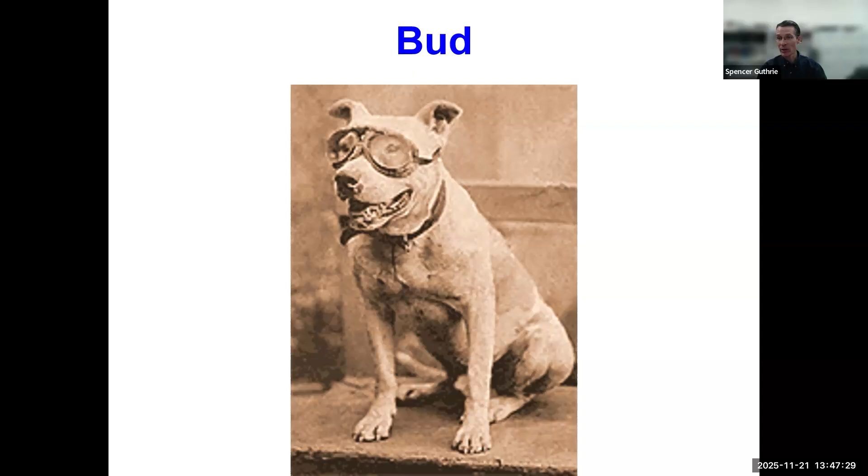After they left, two other groups, hearing of their departure, attempted to beat them across the United States in this historic journey. But they were the first ones, and the car, as well as the goggles, are now on display in the Smithsonian Institute in the transportation exhibit for us to admire.

Since that time, as cars have become more prevalent and the desire for travel became more prevalent, the field of pavement engineering developed in the United States. Of course, our goals are to provide a safe, smooth surface for the traveling public. It's also to provide adequate structural capacity using available materials and to resist deterioration due to traffic and environmental variables. Let's look at each of these for just a minute.

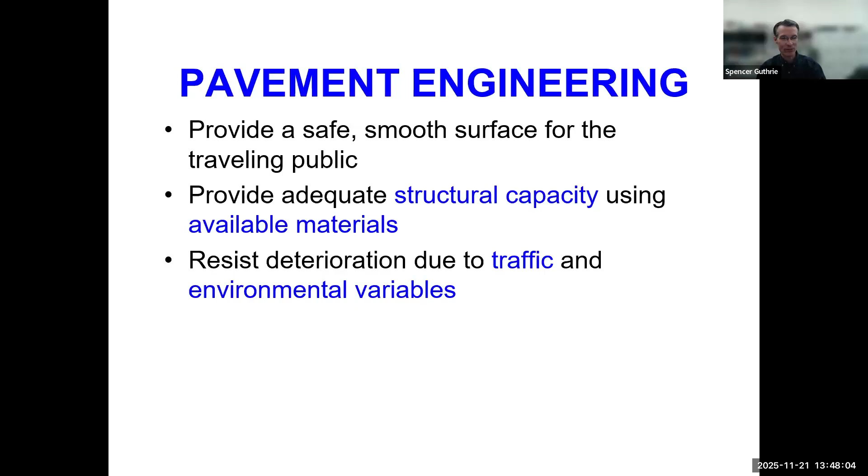Regarding structural capacity, we typically specify various layer types of specified, even calculated thicknesses to ensure that each layer serves its intended function. Of course, we give a lot of attention to the asphalt or concrete at the top, don't we? We hear a lot about it, we see it as we drive. The underlying natural subgrade is what Mother Nature provided us to build the road on. We have little control there.

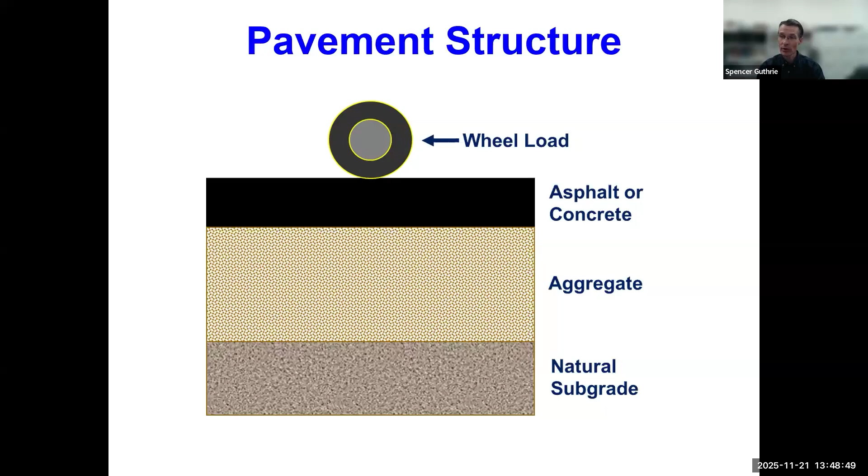I'd like to point out today and emphasize the intermediate layer labeled as aggregate, the base material, often unseen and underappreciated. The base material not only protects the underlying subgrade, but also supports the overlying asphalt or concrete.

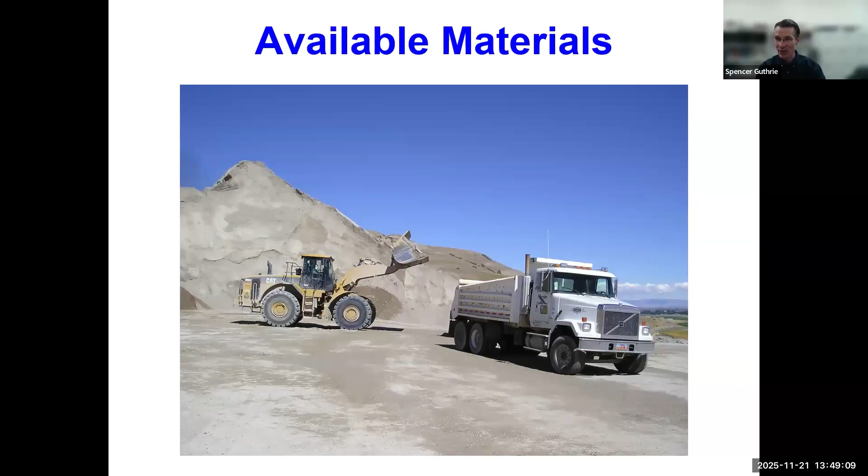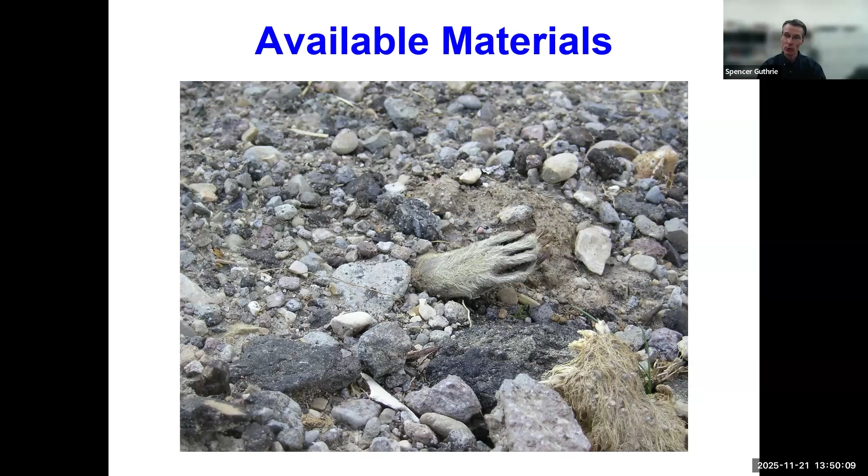Sometimes we need to use that local material. Where my grandparents lived in Louisiana, I believe they had more alligators than they did aggregates. In those places, sometimes it was more cost effective to barge aggregate in from South America than to truck it in overland from West Texas, for example. So thinking about available materials is very important in the design process. That means if we're using inferior materials, such as pictured, we need some way to stabilize it and improve its engineering properties.

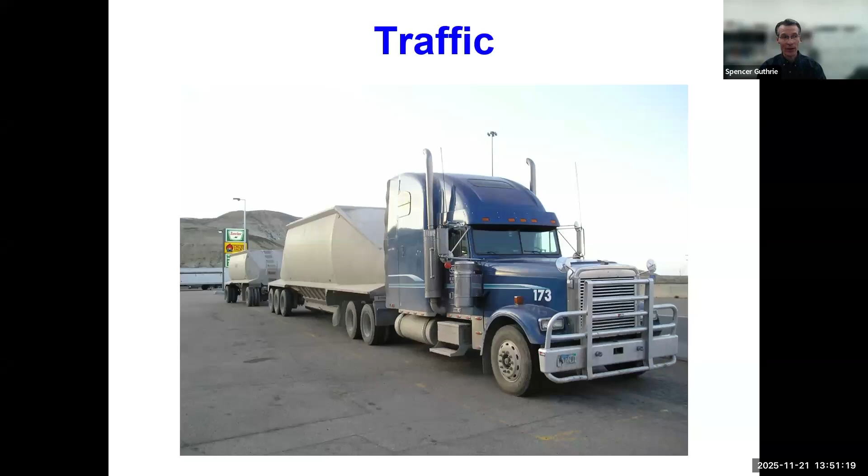We like to keep water out. We want roadways to be well drained with an appropriate cross slope and longitudinal slope, and we need adequate drainage structures. In some ways, pavement engineering becomes a very multidisciplinary field that is quite exciting.

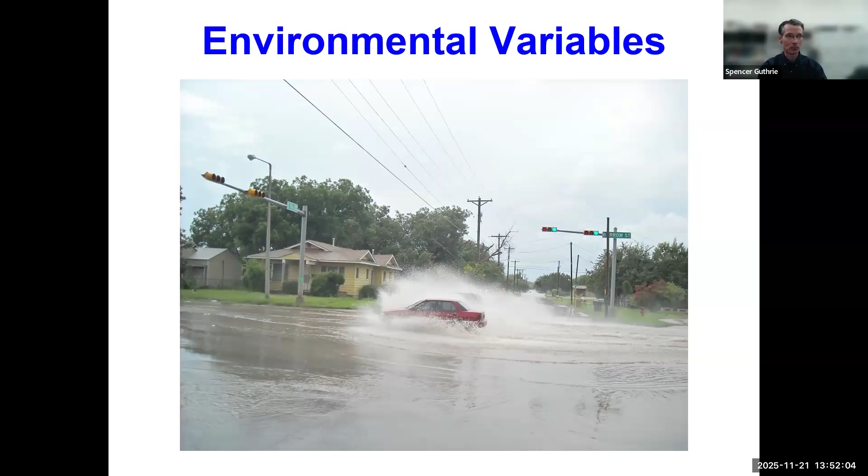Because of the snow and ice and Utah's very clear bare pavement policy, we spend a lot of money clearing roads. In fact, in Utah we have about 22 to 25 major storms per year, and we spend about $1 million per storm just clearing the roads. We'll apply about 200 to 300 pounds of salt per lane mile per storm. This is a very significant part of what we do.

Freezing weather also freezes the underlying materials, and sometimes that causes frost heave, a lifting of the pavement surface that causes roughness and sometimes requires a reduction in speeds.

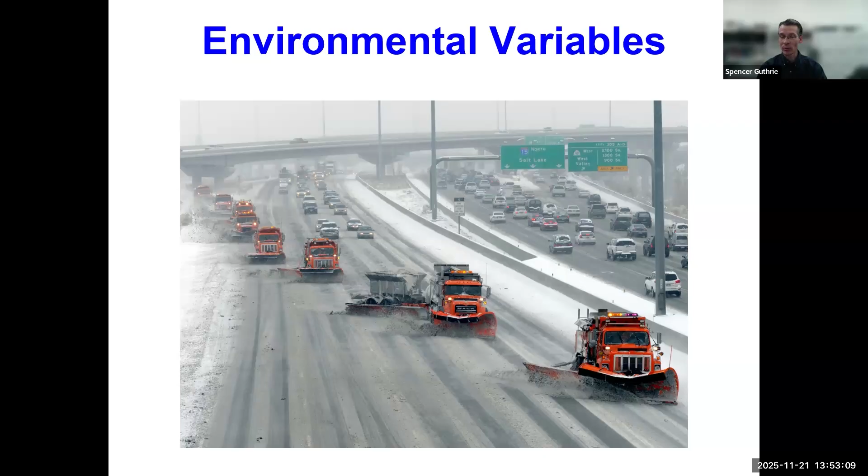So regarding pavement condition as a result of these variables - trafficking, water, and freezing - we have some deterioration that might occur. Nationally, roads received a grade of D+ in the 2025 ASCE Infrastructure Report Card, and some challenges come along with this.

Funding for road reconstruction remains limited while costs are escalating. Traffic is increasing, and drivers have high expectations for serviceability. We want to go where we want to go, when we want to go there, and we expect a smooth road.

Pavement engineers and managers are therefore focusing increasingly on preservation of existing roadways under the mantra that good roads cost less. In other words, spending $1 on maintenance now can save us $10 on reconstruction later. Maintaining roads in good condition also positively affects the economy.

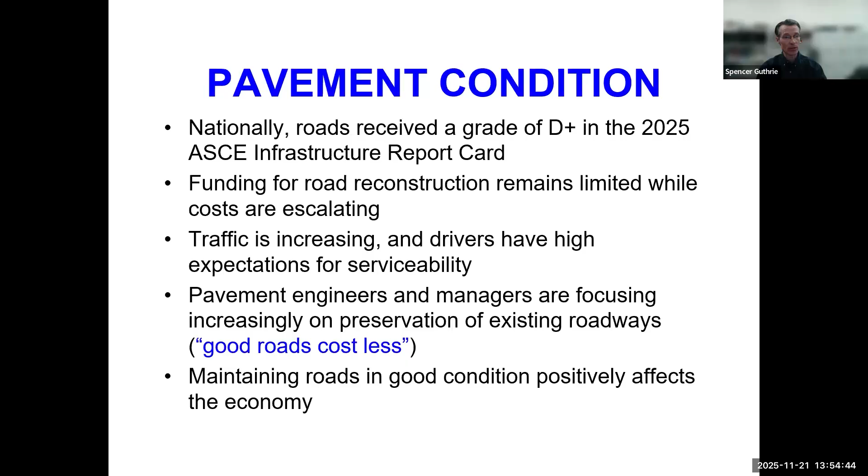In some of our local cities, very strategic policies are made to maintain the most important roads - the commercial roads, the collectors, the arterials - in good condition, even at the expense of the residential roads, because we need to retain and attract businesses so we can derive income from property tax and sales tax to continue to fund the roads. This leads to the important topic of pavement preservation.

In other words, applying the right treatment to the right road at the right time. Earlier in my pavement design class this afternoon, I showed some pictures of an alligator cracked asphalt roadway. Can y'all envision that? Fatigue cracking, structural cracking all across an asphalt roadway.

The city, under a very limited budget, could only apply crack seal one time after another to hold that road together. Ideally, we have crack seal applied early in the life of a pavement, and then as it progresses, we begin to use more invasive or more comprehensive repair services.

The process of pavement preservation is really a strategic process intended to maximize the pavement service life with a minimum overall cost to the owner, and hopefully to the traveling public as well. Eventually, however, despite our efforts to prolong that inevitable deterioration, all roads will need to be reconstructed.

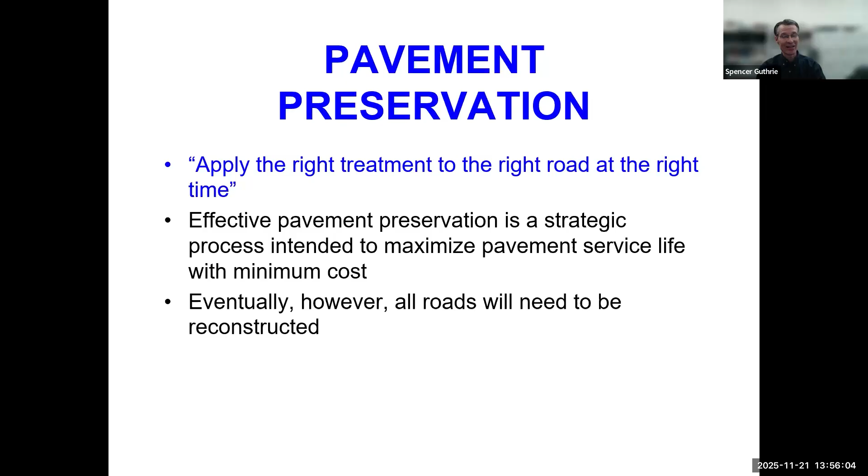A traditional reconstruction might look something like this - the asphalt has reached a terminal condition. I'll pause to note that in the future, as y'all are interacting with members of the media, and referring to a roadway or bridge or other infrastructure, I recommend using the term 'terminal condition,' not 'failed.' The word failed sometimes incites emotion, worry, and panic, so you can just say the road has reached a terminal condition instead.

So here we have such a road, in a neighborhood. The excavation has occurred - we can now see the asphalt, the underlying base material, and in this case the native subgrade, which was clay, very soft clay. The objective was to deepen the pavement structure by removing the upper courses, the asphalt and base, over-excavating the subgrade, then putting back in all of that pulverized material removed earlier, and creating a new base material.

So this is very interruptive. Individuals coming home each night cannot park in their driveways or easily reach their own home. In some cases, public services cannot reach the neighborhood - ambulances and garbage trucks cannot get in. In fact, contractors are often required to carry all of the garbage cans out to the end of the project. These are policies we have to be concerned about - this is a difficult task.

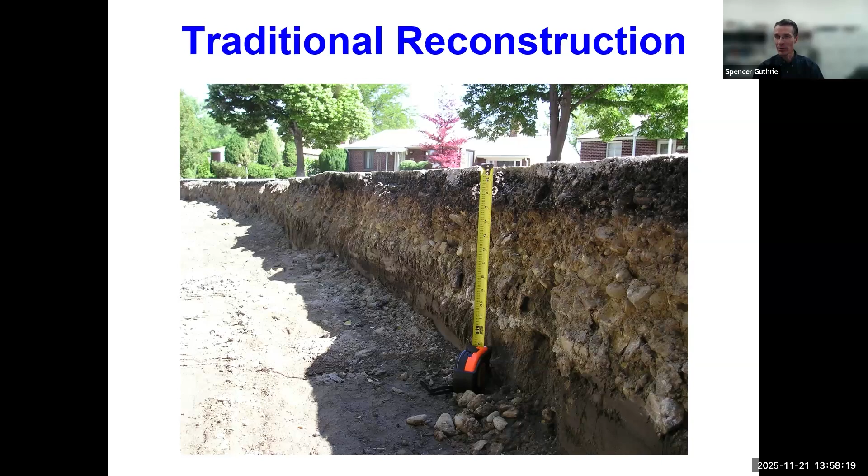So this is difficult, right? There are real costs for our traveling public. And so with that motivation, I introduce a full depth reclamation process that can be very advantageous for many pavement projects. In fact, the process of FDR, full depth reclamation, with cement stabilization is becoming more appealing than a traditional reconstruction approach.

FDR consists of the in situ pulverization of a typically failed asphalt layer with a portion, might be all, might just be a part of the underlying base, to create a new base layer. FDR is most commonly used to rebuild structurally failed asphalt pavements, generally exhibiting at least 20% fatigue cracking or more than half an inch of rutting. Under those criteria, a roadway might warrant some full depth reclamation consideration.

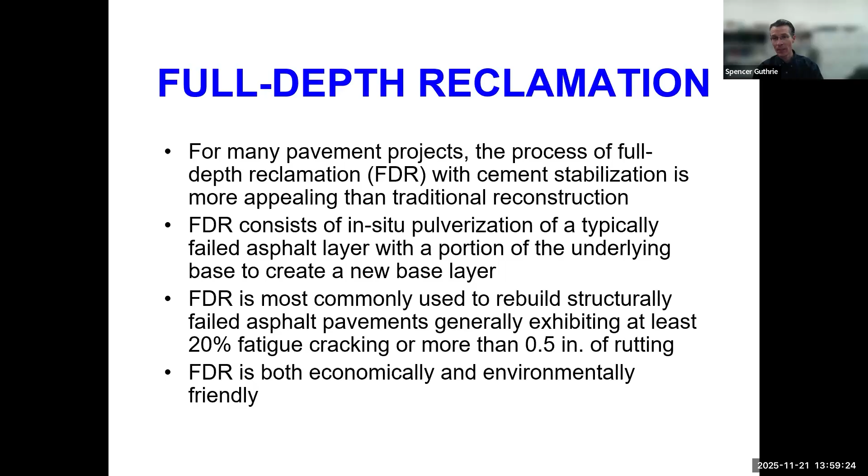It's both economically and environmentally friendly. Let's look at some of the benefits of full depth reclamation. First, it conserves in-place materials. We reuse the materials on site. Mom and dad, or grandpa and grandma, paid for those materials, their taxpayer dollars perhaps provided for the original construction of the road. And now we can reuse, repurpose, and improve those materials by leaving them right there on the same job site. Therefore, it requires little or no material hauling.

And because we're not removing and bringing in new material, we reduce the loads on the adjacent streets. In so many instances, we provide a full depth traditional reconstruction at the expense of the surrounding streets, putting many heavier traffic loads than would have been needed if we had simply used FDR. It reduces construction traffic in neighborhoods, which is improving safety, especially for pedestrians in school zones where children might be crossing frequently. It can also be used to maintain or improve the existing grade to address drainage problems that might exist.

It saves cost by using that in-place investment. We already paid for it. We own it. Why not reuse it? We also save energy by reducing mining and hauls, reducing the use of the original material. And therefore, we say often that it's a very sustainable process.

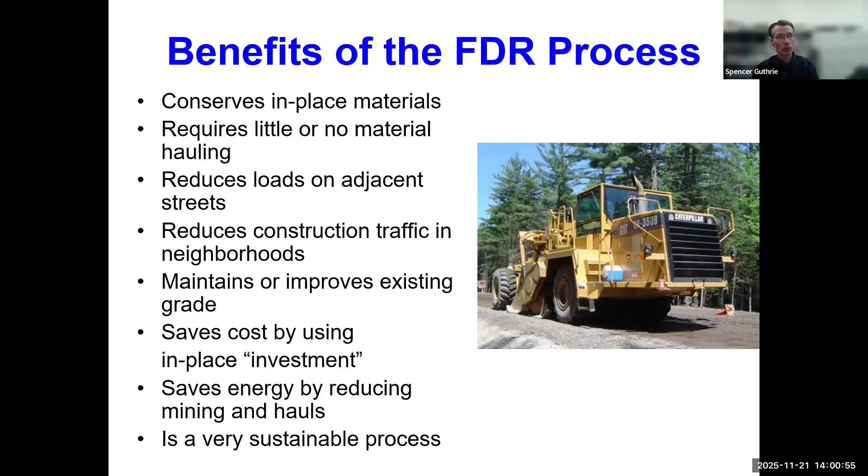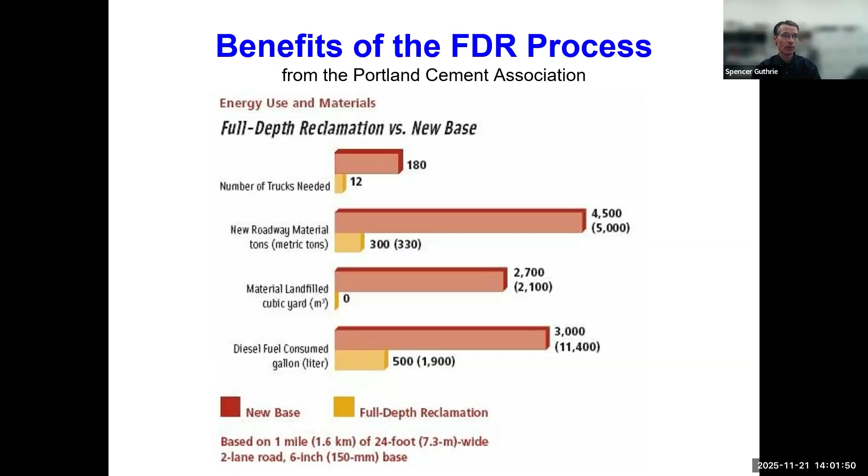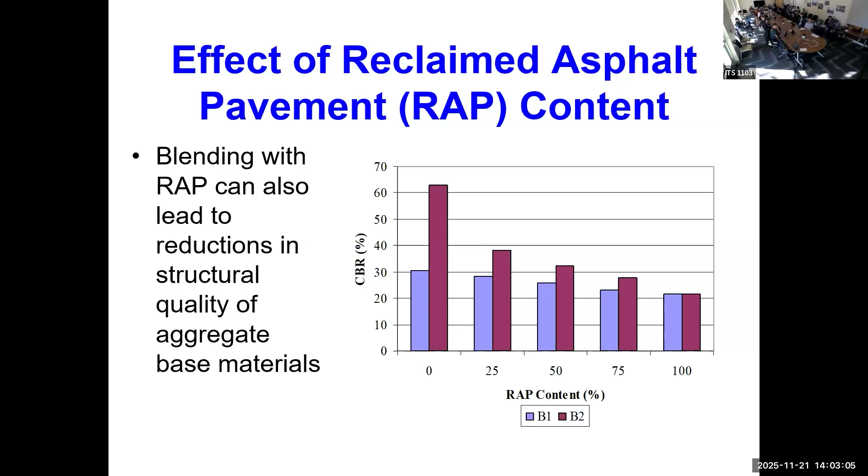Therefore, when we blend RAP with any base material having a higher CBR, such as 30 or 64 in this picture, we inevitably reduce the CBR of the combined blend. And after blending with RAP, we may decide that this blend is no longer suitable from a structural perspective, and it needs some improvement in its structural capacity. And so at that point, we like to introduce the use of some stabilization. In this case, I'm going to talk about Portland cement, perhaps the most versatile, most common kind of cement, the same cement that would be used to make concrete.

When we use cement, even in small concentrations—for example, 2% to 6% by weight of dry aggregate is really common—we get all of these benefits: increased rigidity for distributing loads, an almost entire elimination of rutting below the surface, reduced moisture and frost susceptibility, reduced fatigue cracking of the asphalt layer, and we can use a thinner pavement section, which is frequently a solution when we have existing utilities that were constructed in a shallow manner.

Perhaps many of you have been on jobs where especially a natural gas line was found by an excavator or a reclaimer machine, and now we have to stop all of our work, evacuate the neighborhood, call 911. That's not a happy day for the contractor. So there are a lot of benefits of using cement.

Here's a schematic that shows the...

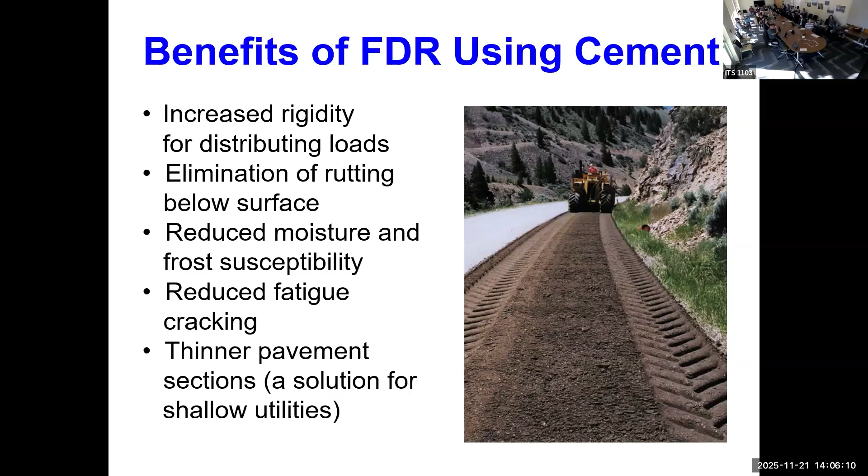May I interrupt for a second? Please, I apologize, we forgot to establish our ground rules for asking questions. Is it okay if we make stop points and see if there are any questions? Sure, is this a good time? Absolutely, anytime anybody has a question, just interrupt. All right, are there any questions on the background, on the method? What are you guys thinking? Here's a question: I've done some cement stabilization before, but I've only heard of up to 4% addition of cement by weight of the aggregate, and I had you mention up to 6%. Could you tell us to what extent you can add what percentage of cement and avoid making the base of the road too rigid for the asphalt layer that's coming above it? Looks like we got a super technical question, Spence. If you don't mind holding on to that one, are there any more general questions about the method and all the background that Professor Guthrie really nicely laid out for us? We will also have time at the end for some more questions and discussion, should y'all be interested. Sounds good, I just sometimes a question gets in my head and then I can't let go and listen to the rest of it. I just want to make sure I don't have anyone like that right now. Got it, dope. Do you want to answer that technical question now or later? I will answer it along the way, it's an important question, and I think we can address it with some additional slides. Perfect, is that okay? Yeah. Okay, fantastic, thank you. You bet.

Here is a schematic showing this full depth reclamation construction process. We start on the left-hand side with the original pavement. As I said, it might be considered failed under rutting or fatigue cracking, the common mechanisms that we see. We bring in a reclaimer, I'll show pictures in a moment, to pulverize the asphalt with all or a part of that underlying granular base material.

And then if we're in a city, which is the focus of my presentation, and we have elevation constraints—for example, existing curb and gutter, existing driveways—then we may need to remove, as shown in step 3, a portion of that pulverized material. Alternatively, we could also just remove the asphalt layer and then cement treat the underlying base without adding any of the RAP.

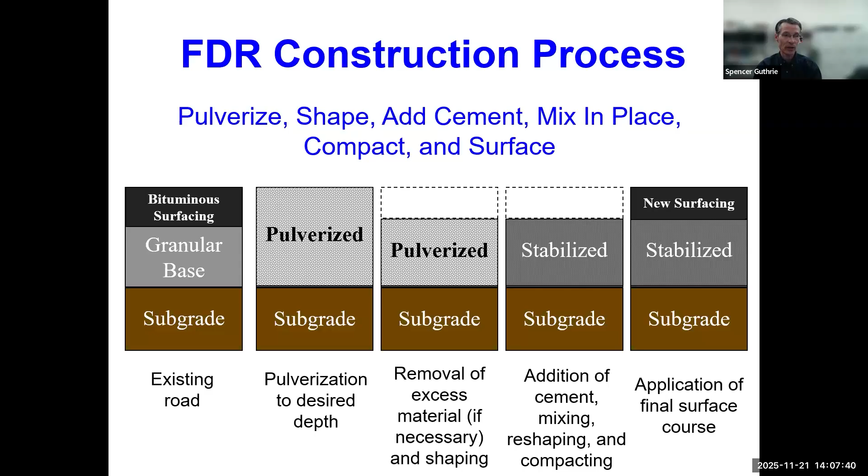The fourth step shows stabilized base material now, perhaps with cement or another appropriate stabilization agent. And once that's been appropriately cured, then we can put a new surfacing, which might be either asphalt or concrete, or in some places in the world, we might just put a double chip seal on top of the stabilized base material. And that's a far lower expense than placing a new HMA or Portland cement concrete.

Up to this point, I've primarily shown you pictures of FDR in conjunction with cement stabilization in very rural locations. Historically, that's where we have been able to use this technology. Today, I'm going to show you an approach that allows the use of FDR with cement stabilization in urban environments, where we often have higher ADTs, higher ESALs, the equivalent single axle loads, where we would benefit even more.

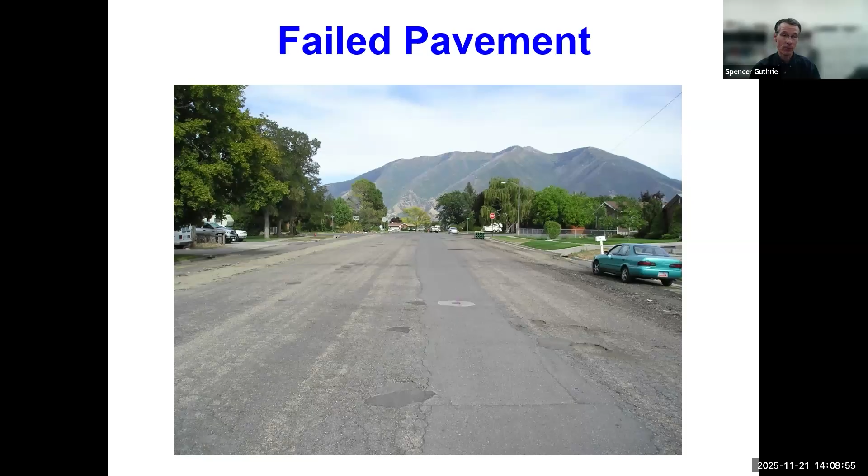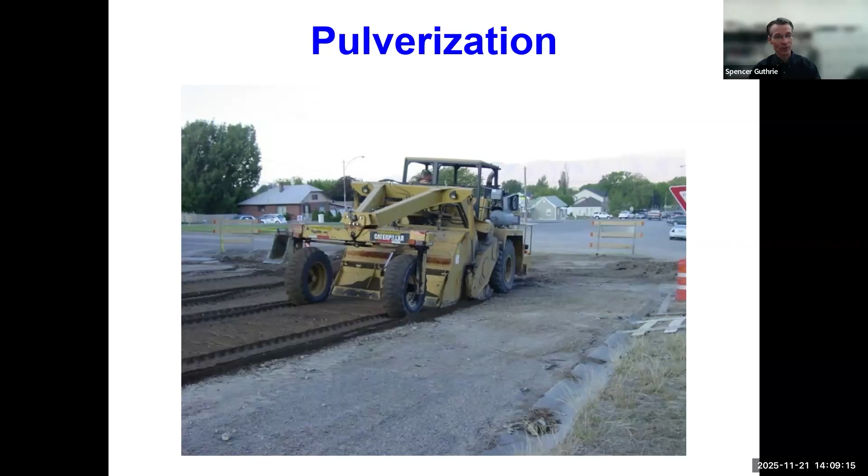So here's the failed pavement, and this is called a reclaimer, a large machine with a rotating drum between the front and rear axles that with a lot of horsepower can pulverize the asphalt and mix it with a portion of the underlying base material. After the material has been pulverized, we can reshape it. If we don't have access to a large machine, we can also use a smaller asphalt zipper. Perhaps some of you have seen these on job sites.

It attaches to the front bucket of a loader and is owned by a lot of cities. They can use this for not only utility trenching, but for full depth reclamation as well.

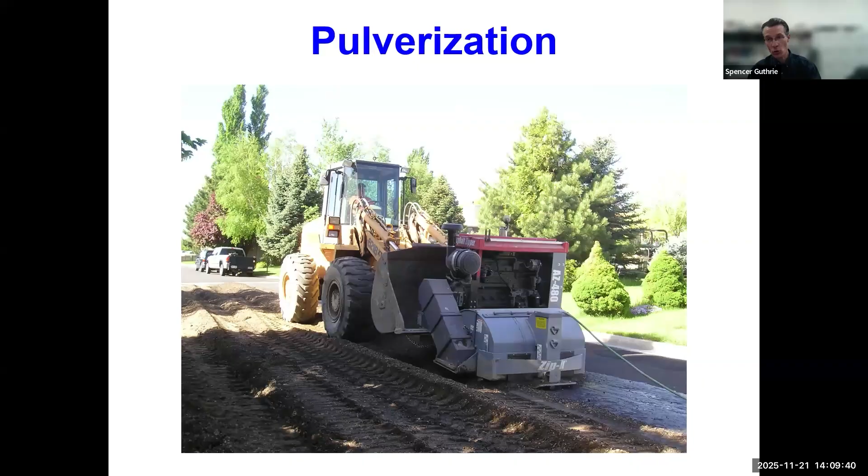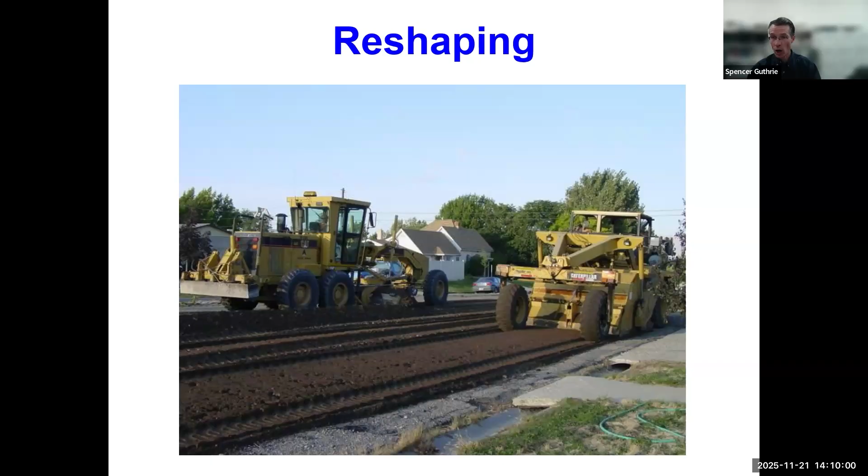And after the reshaping, it's time to spread the cement on a cement treated job. So I want to pause and make a note that historically, the cement is applied as a dry powder.

If I remember right, it was about 2019 that OSHA, the Occupational Safety and Health Administration, implemented and enforced a new regulation governing exposure of humans to silica dust. Portland cement contains a lot of silica, and it's a respirable human hazard.

And it's for that reason that we simply cannot use this process in urban environments. We can't have that dust on our vegetable gardens in neighborhoods. We can't have it collecting on families' cars or their front porches. We can't have it even breathed in by our construction crews. So you have to be really careful with powder.

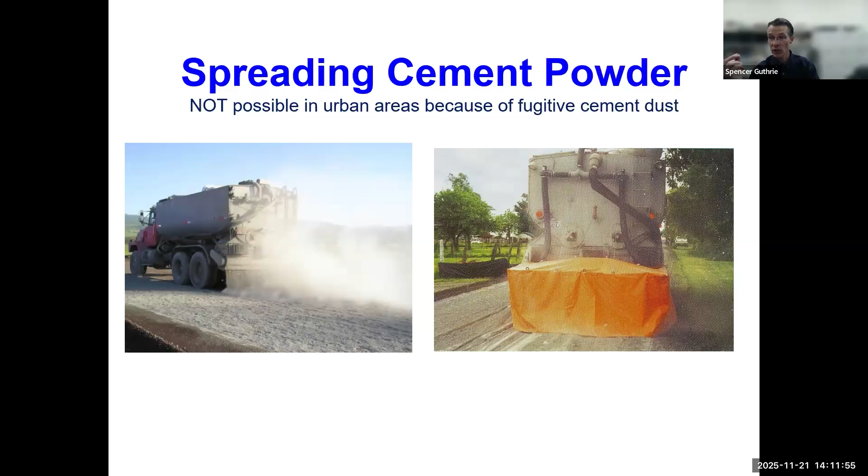Let me show you a project that I was on this summer. This is a project where the cement powder was placed in dry form in the right lane. Do y'all see that? Because it's only a 2-lane road, we have to maintain traffic live in the other lane using a one-way flagging operation. And I'm parked waiting for my turn to drive down the corridor to go do pavement testing.

And here comes a line of semi-trucks. You know what I tell my students? Start rolling up the windows. Everybody get the windows up, right? Because you see what's coming. The trucks, even though the powder is already on the ground, there's enough wind velocity that picks up the powder and just blows it off.

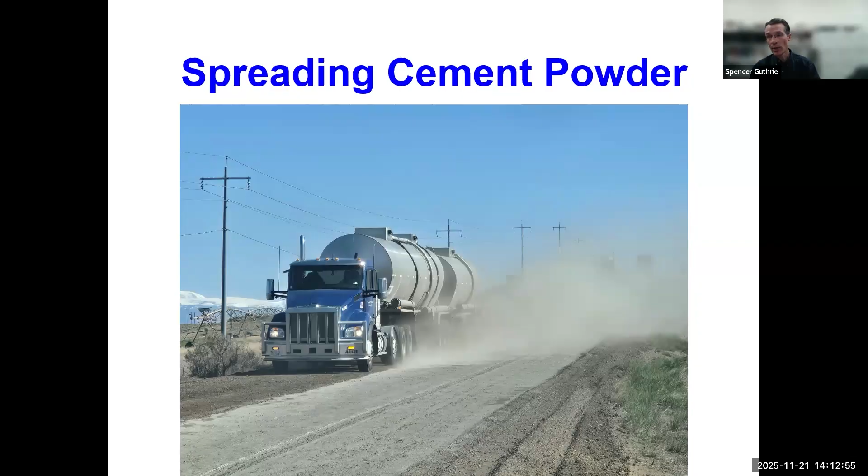There were portions of this pavement where the cement had been placed just hours earlier, but you wouldn't have known. It was all blown away. So this is a significant problem. Look what it turned into after this truck passed. Almost a complete gray out.

And if this is a project where you have two-way traffic, this is a safety issue because we have traffic visibility problems. There are some places like Wyoming where I've worked where the wind blows 30 to 50 miles per hour in the afternoons during the summer, and it just takes all the cement right off the road.

This is an opportunity for innovation, isn't it? When we reach a point like this where we're trying to use good technology, proven cement technology to improve urban roads, we have to think of a different way to do it.

I was very grateful several years ago to work on this project with a Salt Lake City Corporation engineer who was working in a space where he could take risks. He could try new approaches without fear of retribution. And he was smart. We decided to do some of these new efforts that we were investigating on residential roads where we wouldn't have a high risk.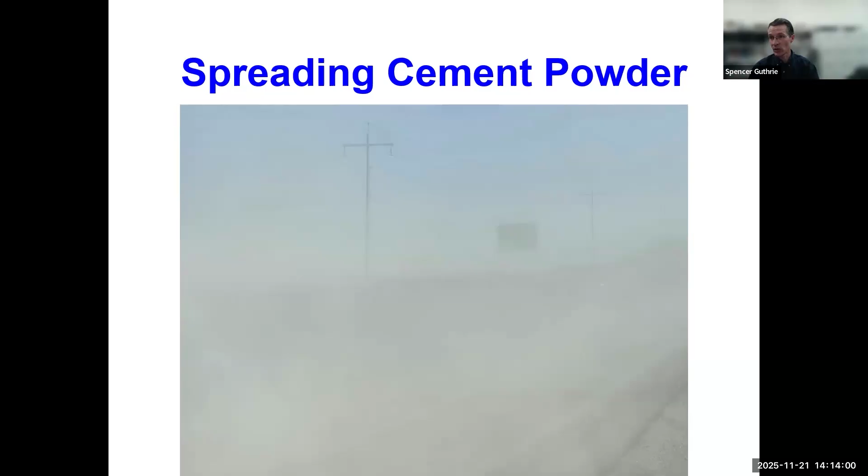And what we invented was a means of applying the cement to the pavement with an absolute total elimination of cement dust. How did we do it? First of all, we involved our very reliable ready-mix concrete industry. We have a great relationship with the concrete industry. And because a local ready-mix concrete plant is close to almost every urban road, we can have them bring cement to our job site. No problem.

We've eliminated the possibility of wind blowing it away, eliminated the possibility of respirable hazards, and eliminated the possibility that the cement dust might settle on someone's personal property.

And we've engaged the ready-mix concrete truck drivers, who are very often available in the later parts of the day once the major concrete placements have been done. We have infrastructure, the ready-mix concrete trucks and plants, available to help us with this project.

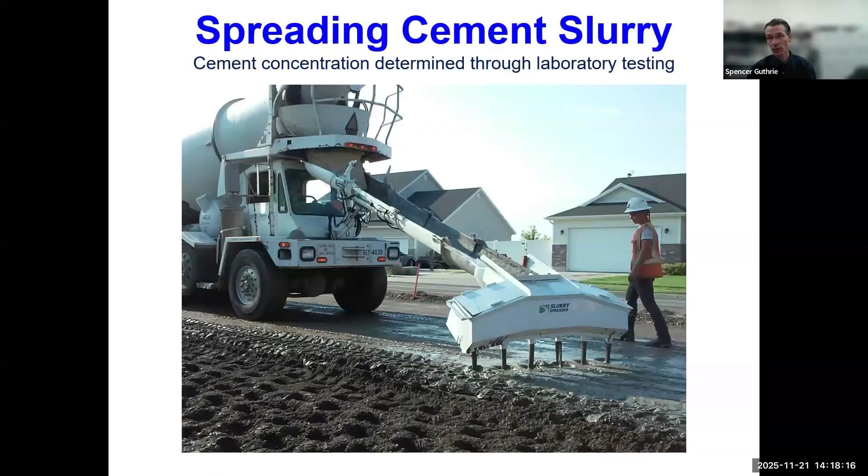Once the truck shows up, we have marked out the area over which it should be unloaded, and we have a person on the ground directing the truck driver. Remember that the driver can swing their chute left and right, move forward and backward, and increase the speed of their drum to increase the rate of delivery of the cement slurry.

And if for some reason we have a new driver—some of them are only in the industry for a month when they're assigned to one of my jobs—they still figure it out fine. And if for some reason they put down a little too much, we have a grader operator who can come on over and blade some of that extra slurry off the high spot onto the spot where it belongs.

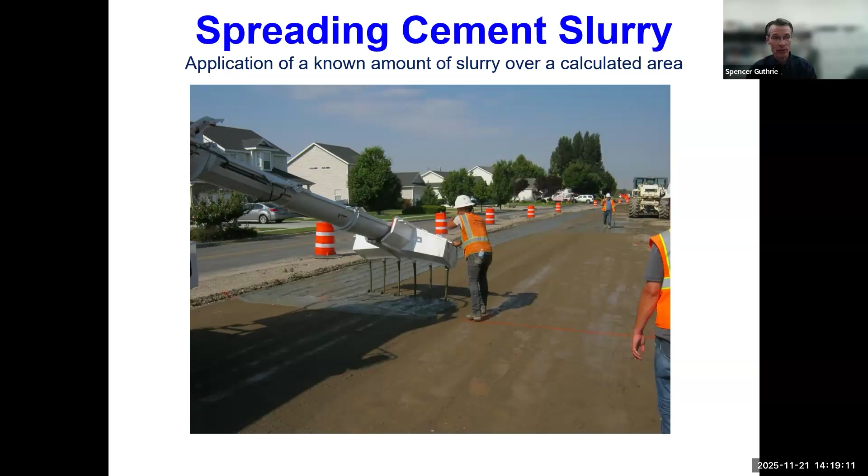So we have an orange line, do you see that across the grade? It's just marking the perimeter; we're going to unload this truck onto the grade. As soon as we start unloading, you see the operation continuing on the far right, then the reclaimer can come on and begin mixing. Generally speaking, unless we've added a hydration stabilizer as I mentioned earlier, we try to get the cement incorporated and mixed into that pulverized material normally within 2 hours. We need to do that quickly, because otherwise the cement will begin setting, and then we will not achieve the proper compaction and grading that we want.

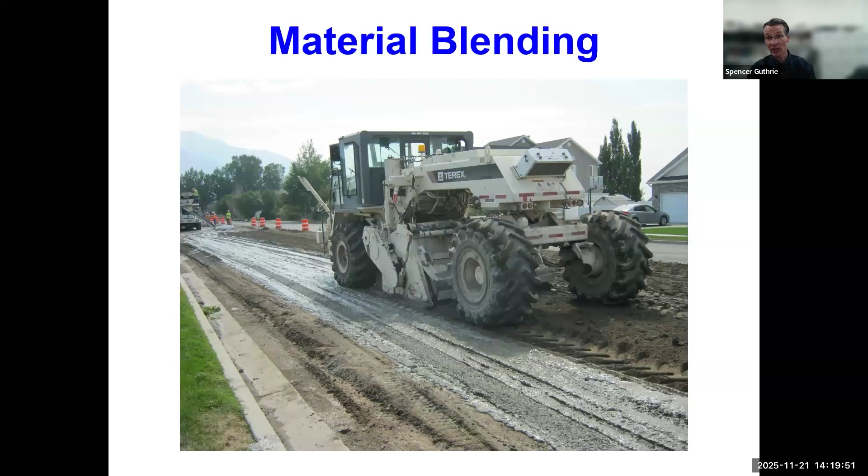So here's a picture—again, no cement dust at all in the neighborhood, and we're significantly strengthening this layer with some cement. After that, we have compaction. Sometimes we see pad foot rollers, other times only smooth drum rollers, but the last roller to touch the road should be a smooth drum. It leaves a nice smooth surface, can crown the road just right, and provides appropriate compaction.

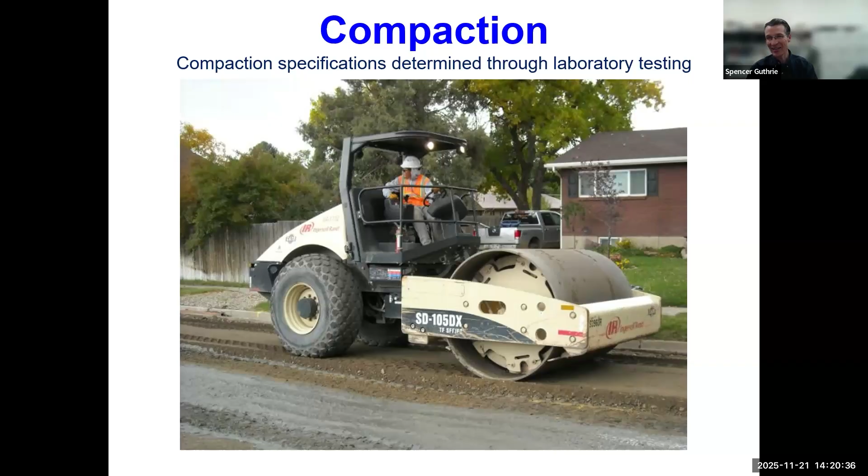I've got a note at the top: compaction specs are determined through lab testing. We determine the maximum dry density, and then we often use nuclear density gauges to measure density very soon after compaction. We can also measure stiffness.

The next step would be final grading. At this point, our efforts are to ensure we have a good cross slope, good longitudinal slope, and enough space against the lip of the gutter, left and right, to ensure room for the appropriate asphalt or concrete thickness—making sure it's graded before the cement begins really setting up.

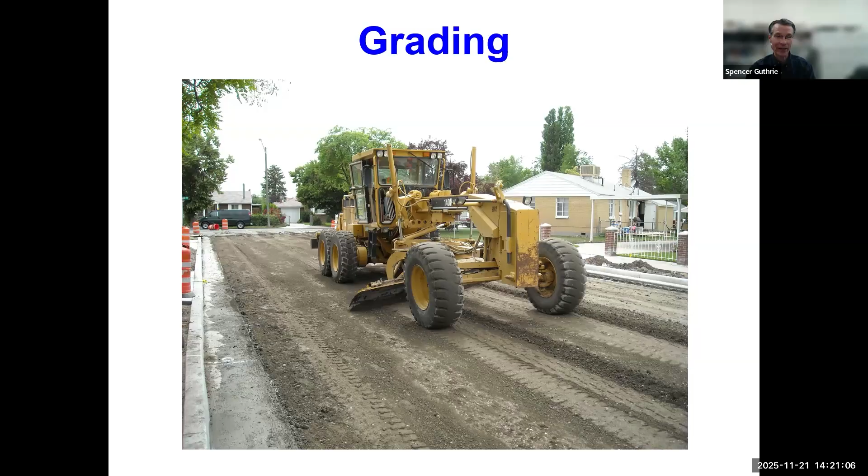Okay, after the grading is finished, it's time to cure it. Just like we cure concrete, we cure a cement-treated base. Our intent isn't so much to add water to the layer, it's to prevent the water that's already there from evaporating. That's the same concept we use for concrete. When we put concrete cylinders we've cast in the laboratory into a fog room, we're just surrounding them with 100% humidity to prevent evaporation.

Well, here, exposed to the wind and hot air, evaporation is constantly happening. So we have to restore the water by bringing a water truck. Sometimes in Utah, where the measured relative humidity can be as low as 6%, and the wind picks up at night as air moves down from the canyons into our lower land, we might have to do this many times through the night just to keep it wet.

There are alternatives. We realize we're in a desert environment and don't like to use a lot of extra water. So if we need to, we can simply apply a prime coat, a bituminous seal coat, to the top of the cement-treated base, and then we don't have to keep watering it, so to speak.

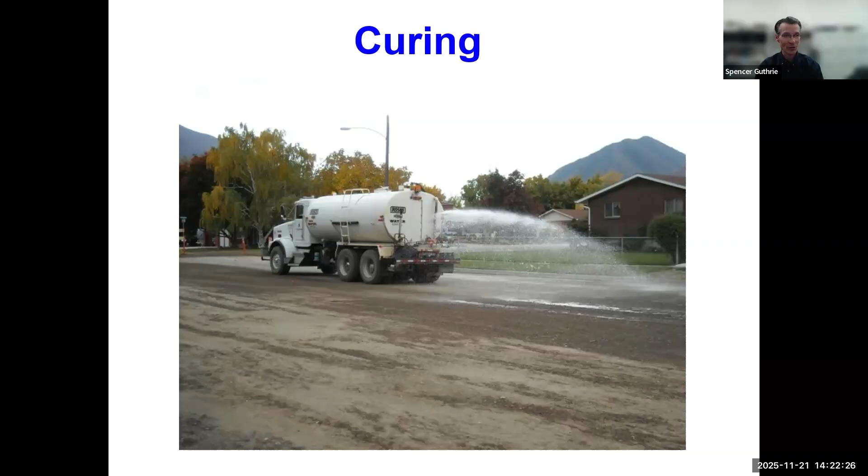So at this point, we're curing. During this process, notice we never dug out all of the material. The residents can come home to their driveways and park there. The garbage truck can get in and out. If there were an emergency, an ambulance could come. We don't have to worry about those concerns—so very minimal disruption to our neighborhoods, to our communities.

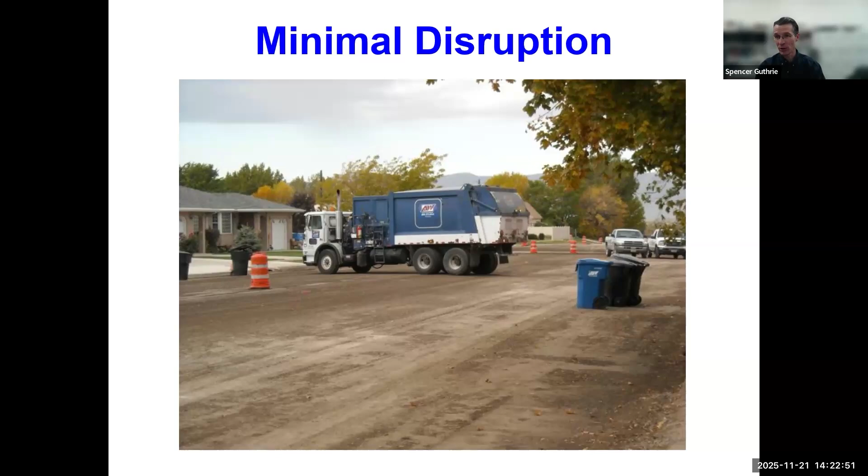Now, just like concrete, cement-treated base also shrinks a tiny amount when it cures. To accommodate shrinkage in concrete, think about sidewalks—we deliberately install joints. We perforate the concrete, forcing it to crack at specific locations with a more desirable geometry, so the cracks are straight and easier to maintain. We don't do that for cement-treated base.

And if we don't intervene, it will crack on its own approximately 15 to 30 feet down the road, and those cracks will often reflect into the asphalt. I'll show you a picture. When I was at Texas A&M, where we used a lot of cement treatment and lime treatment and had a lot of this cracking problem, we had to figure out a way to stop it.

So my research group designed an experiment where we introduced a new technique to the industry called microcracking—you might also see it in our early publications called pre-cracking. The idea is that just 2 or 3 or maybe 4 days after construction, during the curing process, we bring the same smooth drum roller to the job site, turn the amplitude of vibration to maximum, and have the roller operator drive up and down the grade several times while we monitor stiffness after each pass.

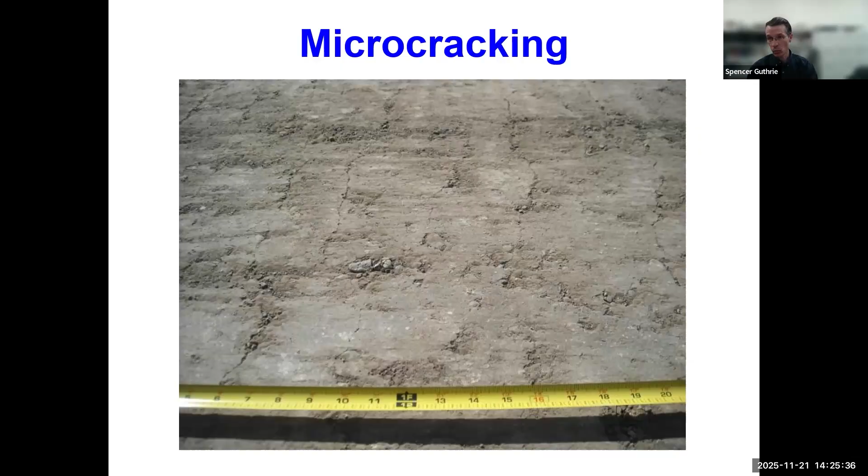But remember, the cement is not finished curing, and it will continue providing strength gain, such that by the end of 7 days, we normally see a complete restoration of the original strength, and it will continue gaining strength after that. So that's the microcracking procedure, and this is what you get if you don't microcrack.

I worked in the flexible pavements division at Texas Transportation Institute, and my supervisor was Tom Scullion, who provided that picture. Not pretty, structurally sound, yes, but there's some roughness here that we would like to avoid, and some maintenance issues, the crack seal, we'd like to avoid when we over-stabilize and cause the shrinkage cracking.

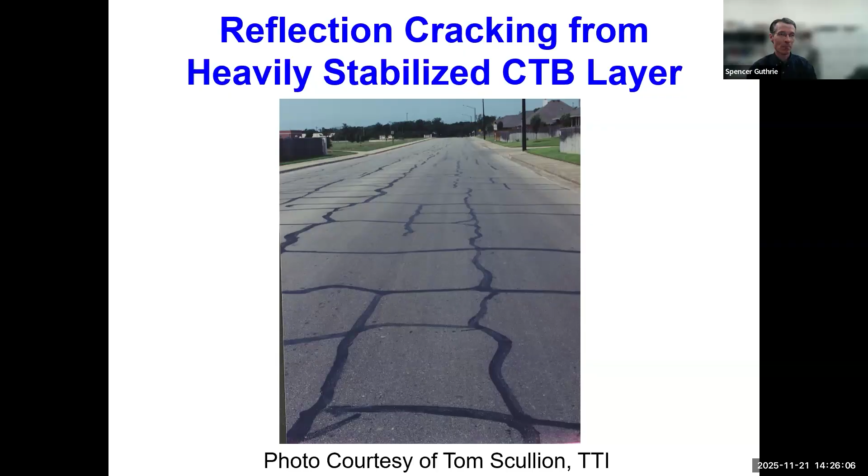Okay, we're now ready after microcracking for surfacing, and that can be a new asphalt layer, or it can be a new concrete layer. What I do want to emphasize, though, regarding policy on this matter, is that before we start any of this process, we need to be thinking about the underground utilities, don't we?

When I first moved to Utah and purchased a home where I live now, I observed that the Utah Department of Transportation arranged for a contractor to come place a brand new, beautiful asphalt overlay along one of our major principal arterials. Then, to my astonishment, just one month later, the water department installed a new water line. So for those of you in transportation policy, I beg you, ensure that we have good communication between divisions in municipalities and departments of transportation so that we don't end up with such a disaster, where we've just cut into a brand new asphalt overlay.

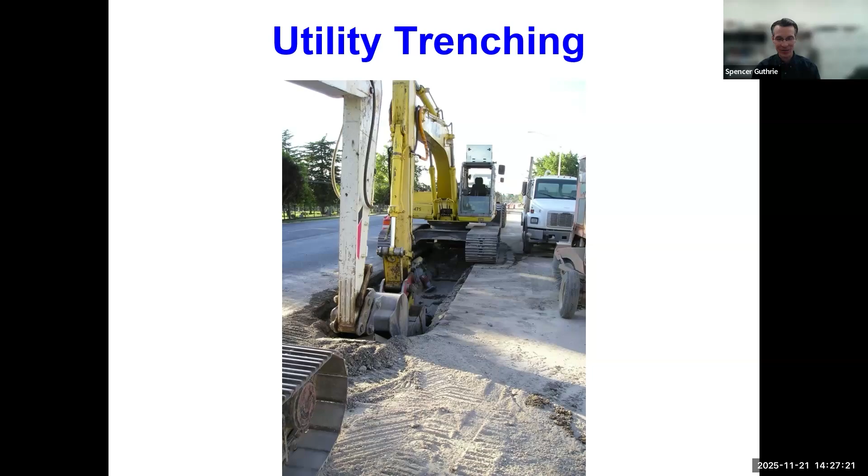All right, here's my concluding slide. Full depth reclamation in conjunction with cement stabilization can be a very effective method for reconstructing failed flexible pavements. In particular, cement slurry can be utilized in urban areas with absolutely no fugitive cement dust. It can be applied using a ready-mix concrete truck, which is available almost anywhere, and equipped with a slurry spreader. We have been using this method now in Utah for more than 10 years. Many cities now own roads that are constructed using this technique. There are new projects always on the horizon.

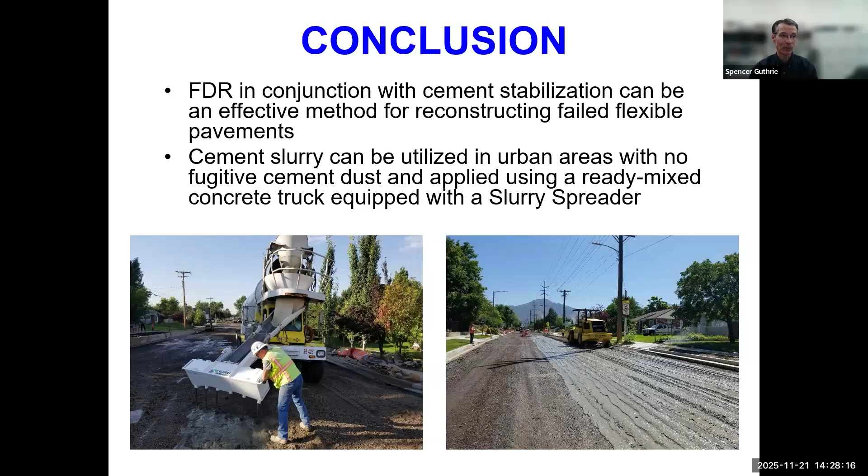It's a really great technique for saving money on the side of the owner and saving money on the side of the traveling public. So thank you very much for your attention. I do hope that we can have some discussion and let me answer some of the questions that you might have.

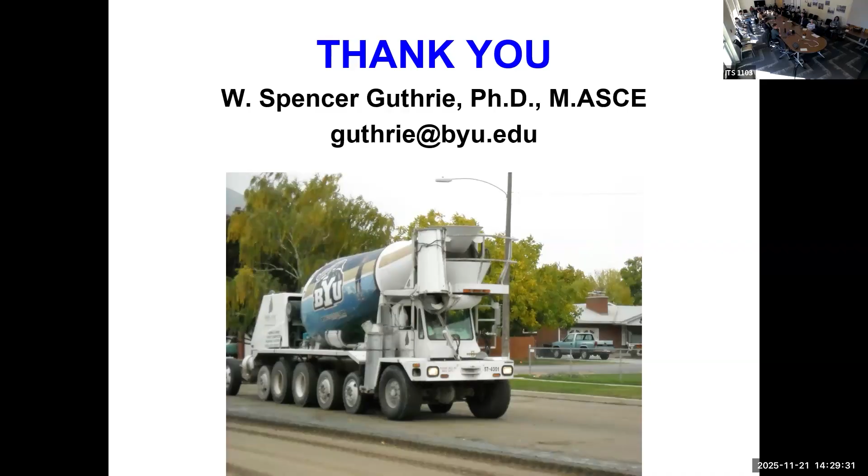Sir, how did you apply the microcracking? Was it by the run of the roller? Yes, as we go back to the picture, I normally recommend a minimum 12-ton roller. Generally, it's the same roller used for compaction, and we'll have it do a number of passes over a short distance to establish a roller pattern. We're typically looking between 3 and 5 passes, sometimes as few as 2, to establish that cracking pattern. The vibrator is on full amplitude, so it's bouncing, to induce a lot of energy into that cement treated base. We just walk it along at a fast walking speed until we've achieved the cracking pattern. Then we stop. It's very important to stop before we go too far or we damage the cement treated base.

Thank you. Where are the pavement students? I see you guys back there. Any questions? All right, we're not getting any. That's okay. Anyone else? Going once? I have one. Oh, go ahead. We'll go here first.

I guess I had questions regarding, because it sounds like public roads need maintenance over a long period of time, and rethinking or thinking through more feasible and environmentally friendly options to maintain those roads. But in terms of new development, particularly in the home building sector, I know developers have to build those streets out and then dedicate those roads to the city or jurisdiction. So I'm wondering from that perspective, are engineers within that sector thinking through about the type of materials that are feasible and cost friendly?